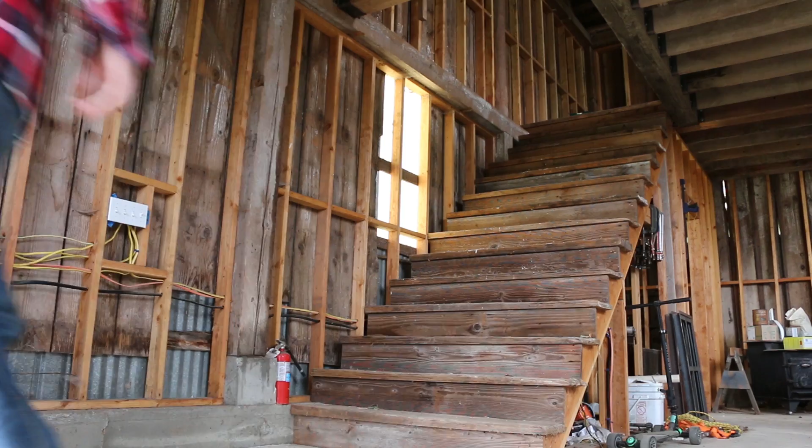Ready to start working on my deck. I'm really excited about it. I think it's going to be a fun place to hang out and drink a beer after work in the summer. So the plan is to plant hazelnuts in this whole field right here eventually, and my view will be blocked. So I think it'll be really nice to have a deck that's up high and you can look out over the field and enjoy the view we have here.

First, let's jump on the computer and I'll show you my design, and then I just got to get to work. I have some concrete being delivered in a couple days, and I got to build some forms for the footings down there. So let's go.

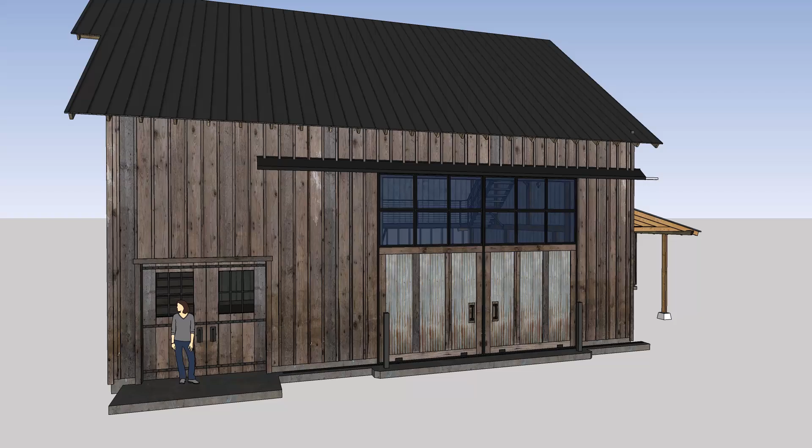My barn has an overhang on the north side of it, and I'm building the deck over the top of it. I thought about tearing the overhang down in order to build the deck, but it's actually a pretty convenient place to park a pickup or other farm equipment where it's out of the rain and elements. It might look a little weird having a deck above it, but you have to leave a little bit of room for practicality here and there.

Okay, so here's my rough game plan of how I'm going to build this deck. The first thing I need to do is to build a temporary wall to support the weight of the overhang, which will let me remove the wooden uprights supporting it. The 2x6s that are scabbed together across the underside of the overhang are rotten, and I really want to replace them with a bigger 6x6 pressure treated wooden beam.

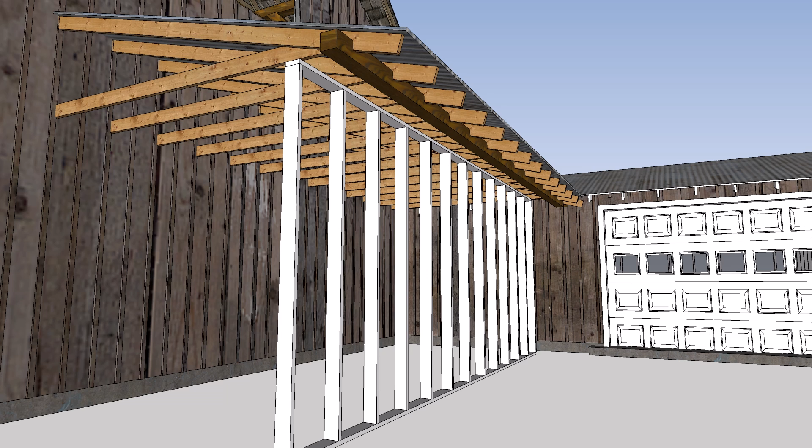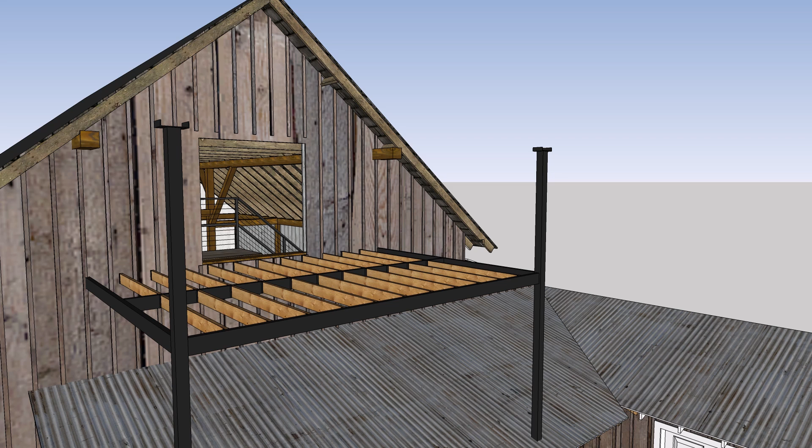Next, I'll pour some concrete footings that'll support the 4x4 square metal tubing that'll support the weight of the overhang, deck, and the roof above it. Once I get those in place, I'm going to attach some 2x6 metal tubing. That will be the frame for the deck, and I'll weld hangers onto these, which will hold the 2x6 pressure treated floor joists. On top of that goes the 2x6 cedar decking, and then I'll fabricate some railings.

I'm going to extend out these big wooden beams that run through the inside of the barn, and then somehow build some rafters on top of them. Haven't quite figured that part out yet. And cover it in roofing, which I also don't really know how I'm going to do. Lastly, I'll install a door to keep the owls out.

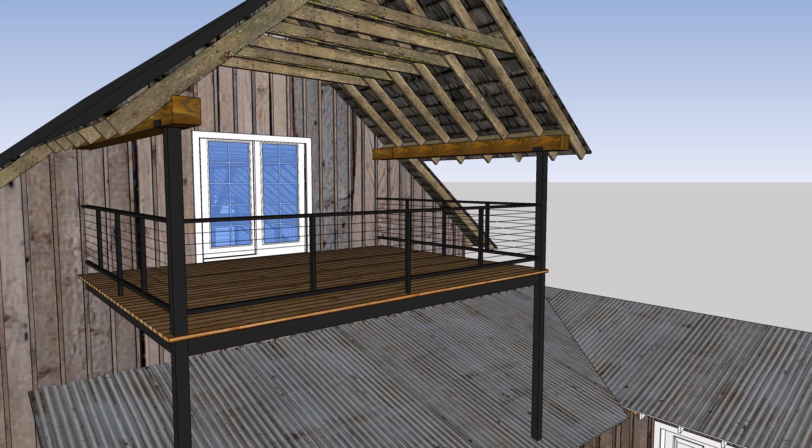That's the plan though. It's going to take a lot of problem solving along the way, but I think it's all pretty doable. It might need a little more bracing, some gussets on the corners, and maybe even some cross bracing across the front. But I'm gonna leave that for the end, after it's all built and I can see how it feels and determine if it needs more bracing at that point.

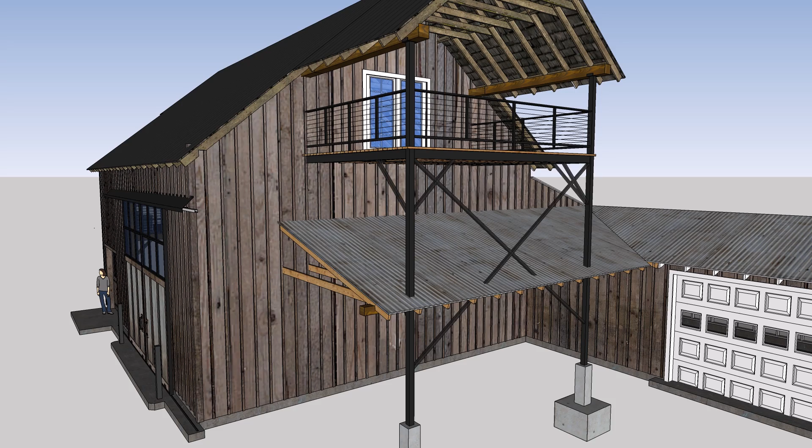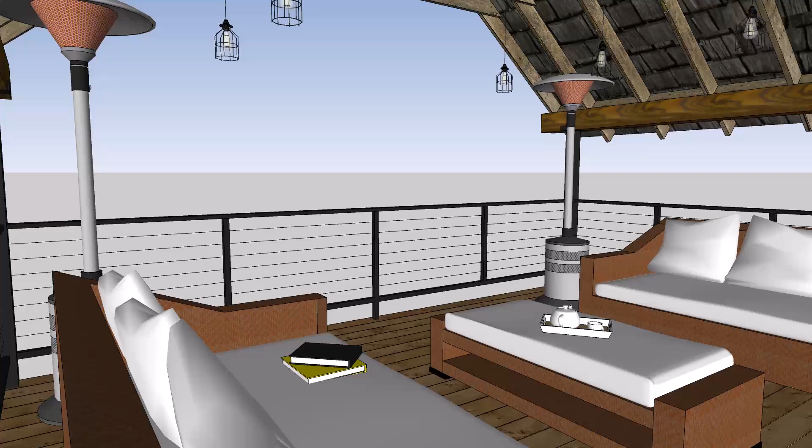Building a deck 20 feet in the air without a structural engineering degree and putting it out on the internet for everyone to see is a great way to create an unstoppable wave of scrutiny with regards to the deck's safety. With that being acknowledged, here we go.

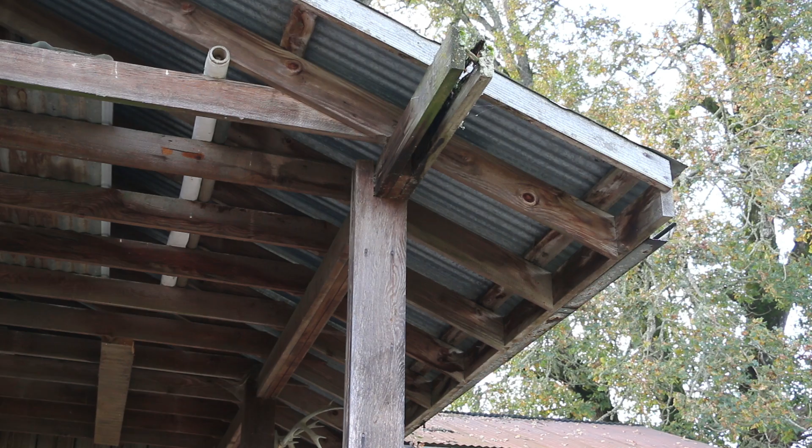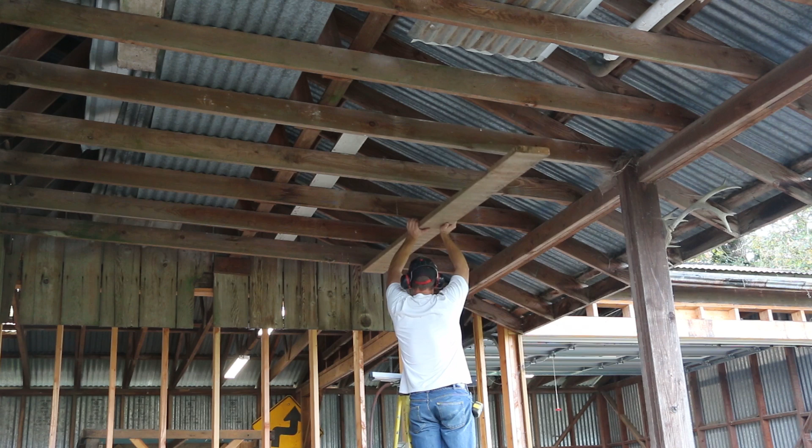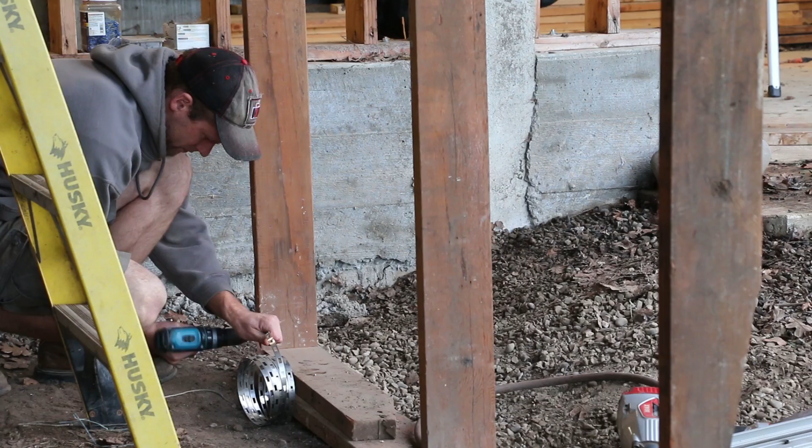The first thing I needed to do was to clean up the area underneath the overhang. I found out this area was my cat's litter box. It was a little gross. These are the 2x6s that I'm planning on replacing that support the weight of the overhang. I got to work building the temporary wall that'll support the overhang in the meantime. After I got all the uprights in place, I attached some metal strapping diagonally to give it some shear strength.

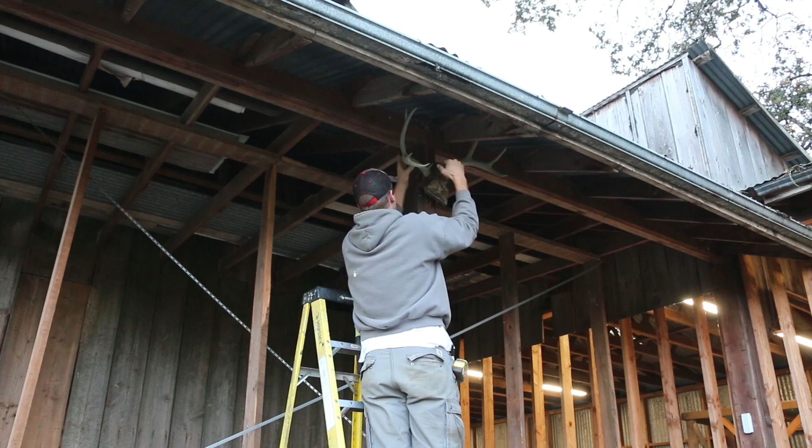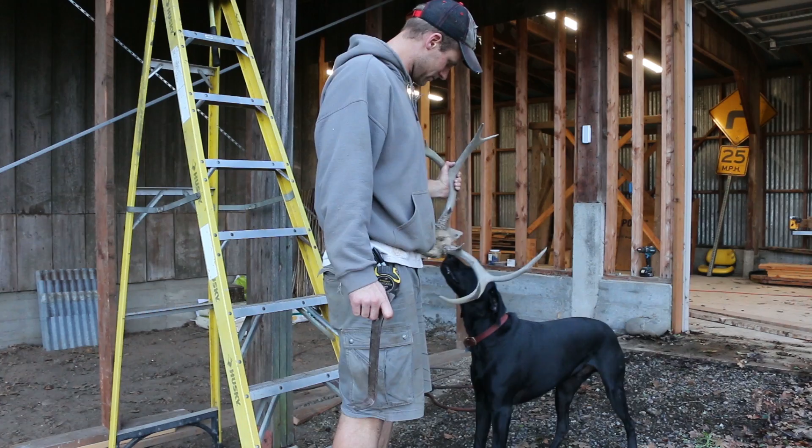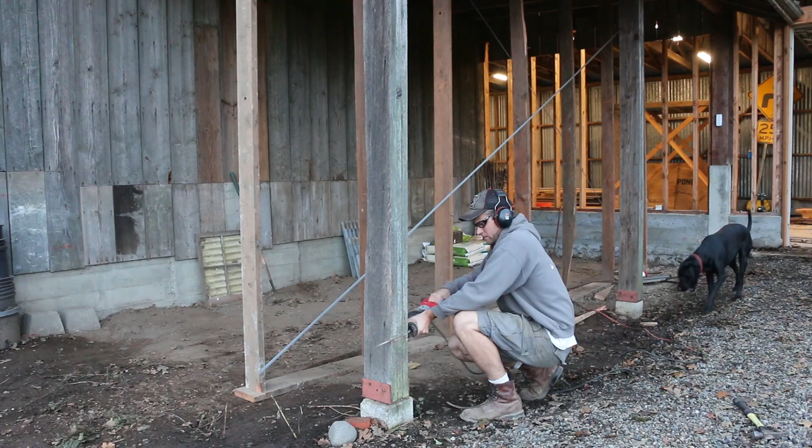It's now sadly time for the deer antlers to come down. Who knows how long they've been up there for. Drake definitely had some curiosity about them. Now that I was pretty sure the overhang was supported well, I could cut out the upright beams that used to hold it. I carried them to a scrap pile in the front of the barn, actually the back of the barn.

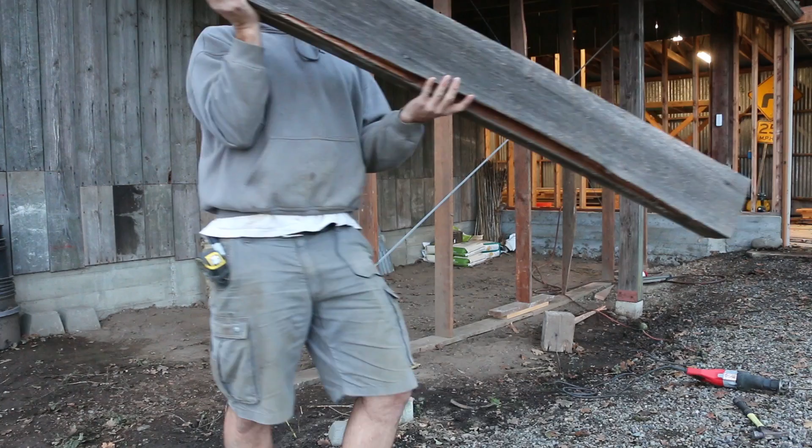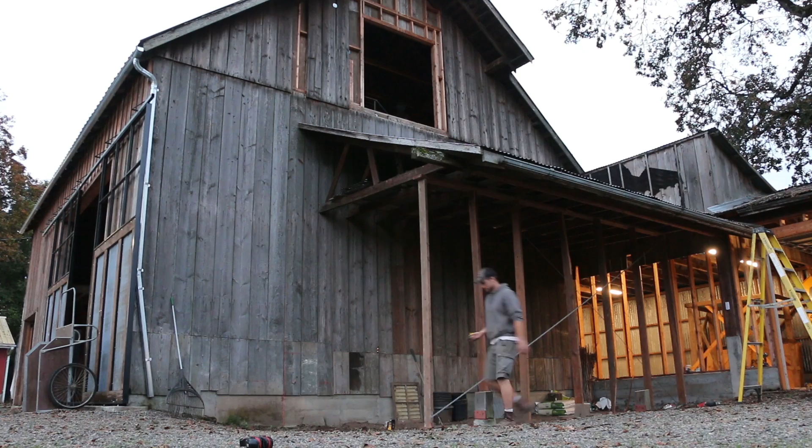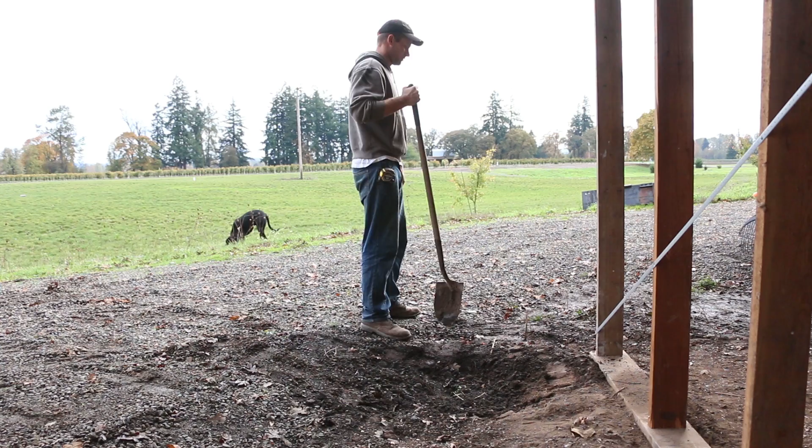I needed to find the approximate area the footings are going to go, and I used my laser level for this. It didn't need to be too exact for this part. I just needed to know roughly where the hole for the footing is going to go. After lining up on the two beams coming out the top of the barn, and also underneath the beam supporting the overhang, I was ready to start digging.

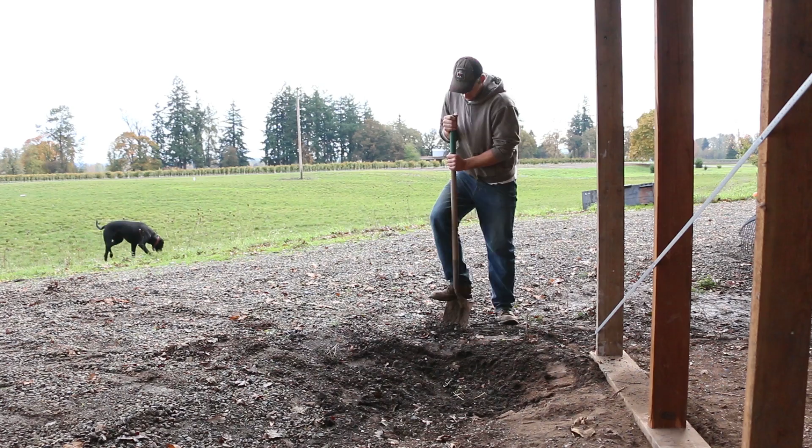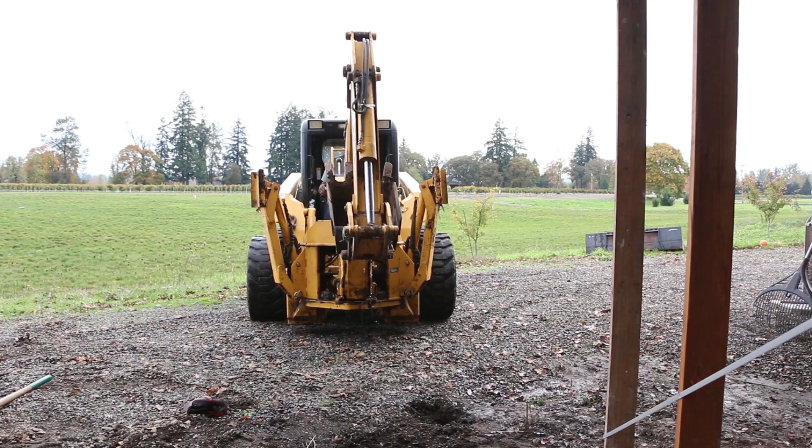I had a ton of energy, and I was really excited to jump in and work my butt off digging these big holes by hand. Some hard manual labor is always good for the spirit and soul. Okay, I might have grabbed the backhoe, but I definitely got most of the hole dug first by hand. Just thought I'd finish it off with the backhoe.

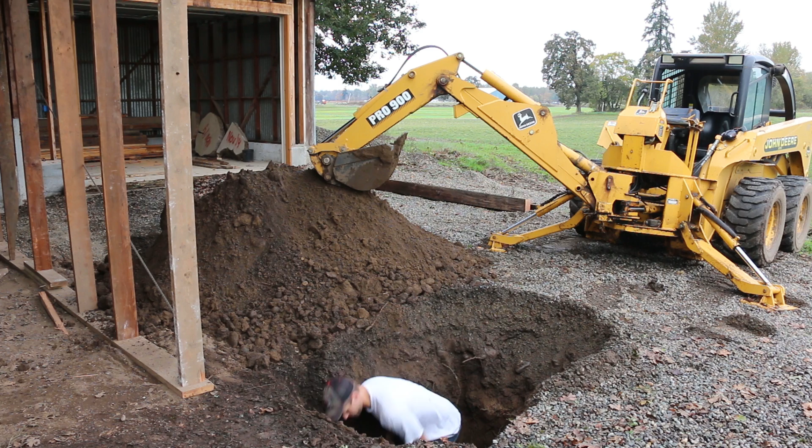I think Drake was really hoping we'd unearth a big dinosaur bone. He watched me dig intently the whole time. I wanted to put 2 feet of packed gravel at the bottom of the hole for the footing to sit on, which is why I was digging the hole so deep.

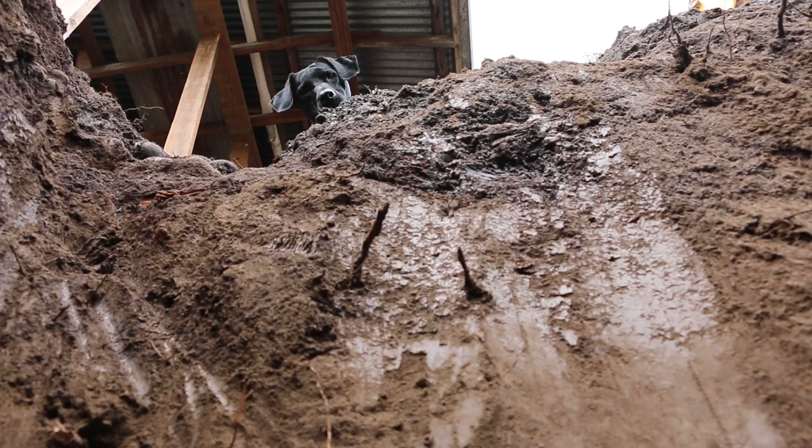Drake. And Drake's habit that I've grown to love of dropping the ball in the hole that I'm digging was a common occurrence here, of course, too. Once I had the holes dug out, I took some scoops off the gravel pile and dumped it in.

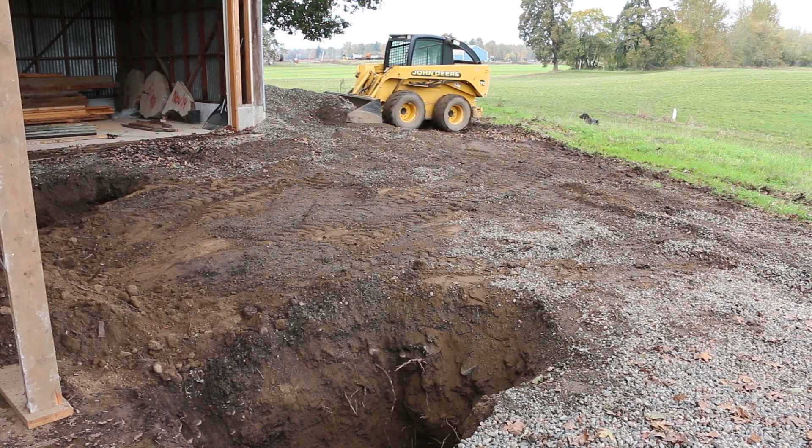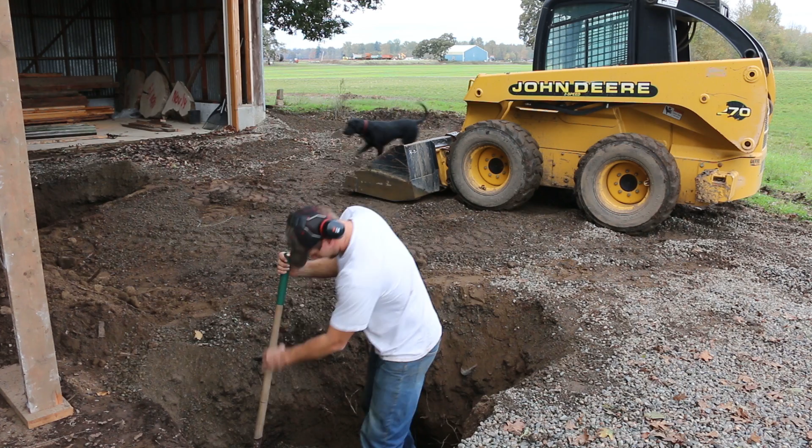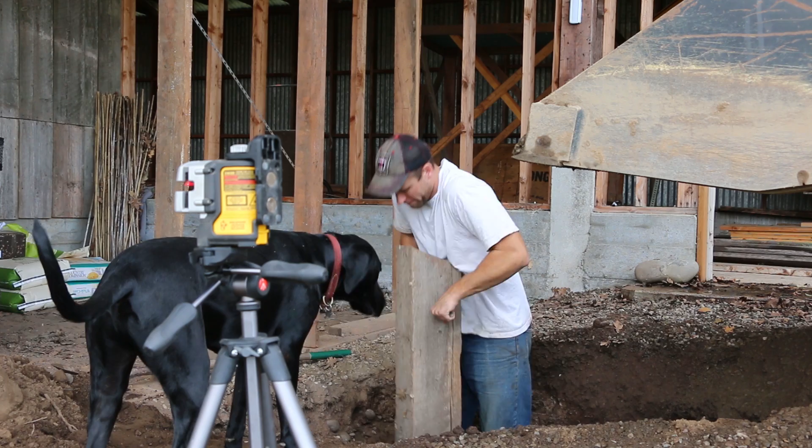Using my laser level set at any arbitrary height, I could measure down to the level of the gravel, filling the holes to the same height. And then my American-made Model 4000 gravel compactor reared its ugly head again. This thing's still not quite running right. Just can't seem to get that sorted out.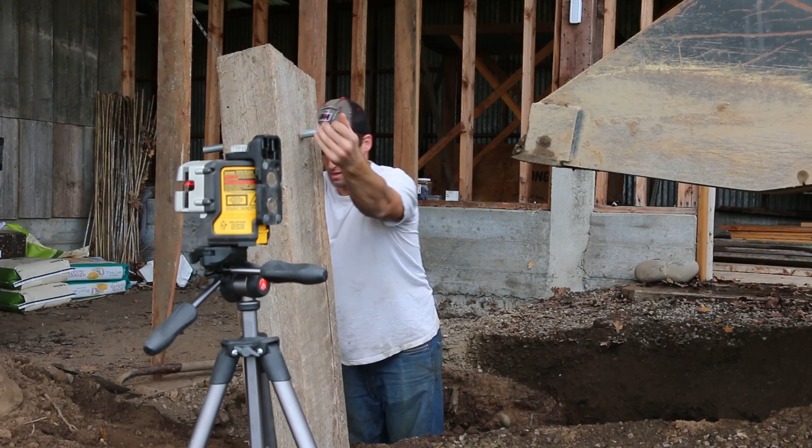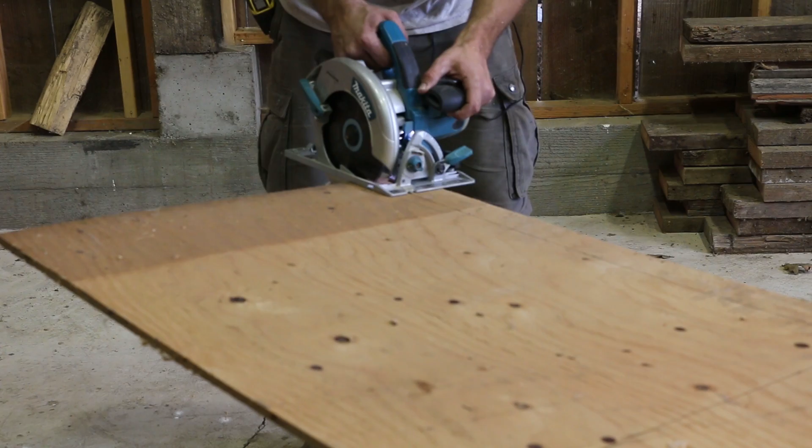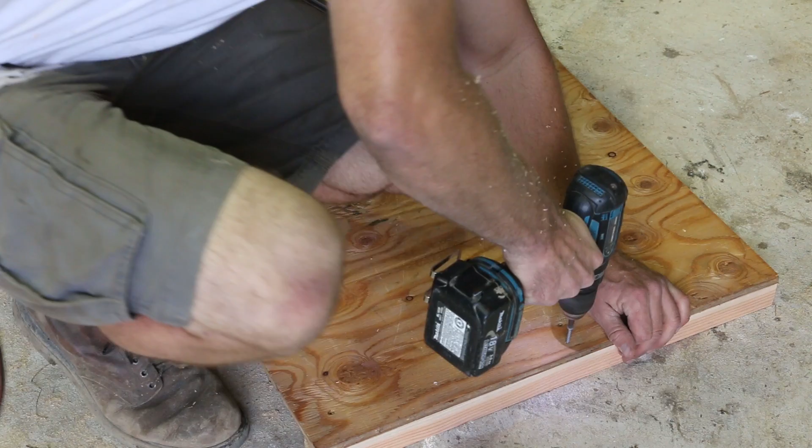I had some nice blisters after using that thing that I had to put up with for the next couple of weeks. Now that the holes were dug and my hands were jacked, I got to work building the concrete forms. I've made concrete forms a couple times now, and I've learned it's just about the worst feeling in the world when you start filling them up with concrete and they start bulging at their seams and deforming and leaking concrete everywhere. So I'd be sure to spend the time now building some forms that are good and strong.

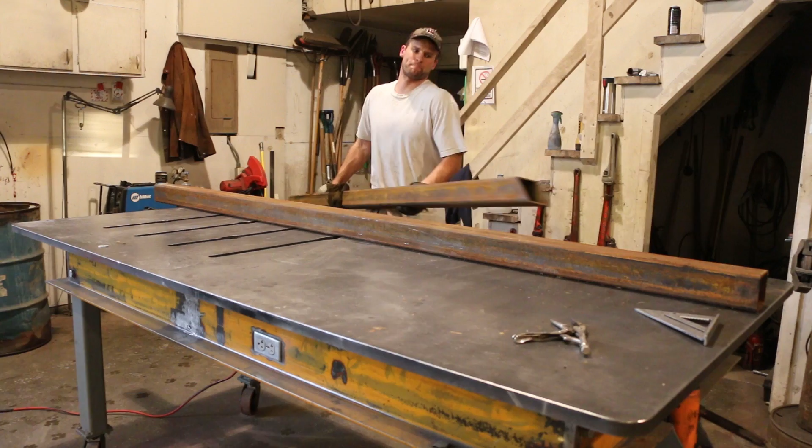I originally made these bottom boxes 3 feet in all directions, but they looked ridiculously huge. So I cut off the bottom foot. So now they're only 2 feet deep. Still huge, but looked reasonable to me.

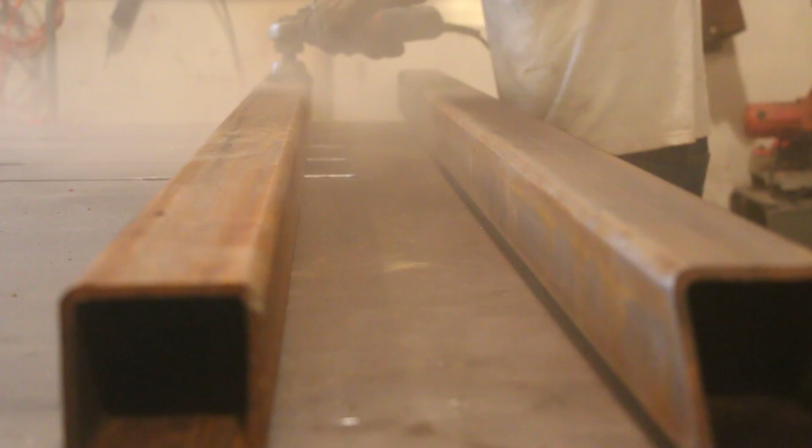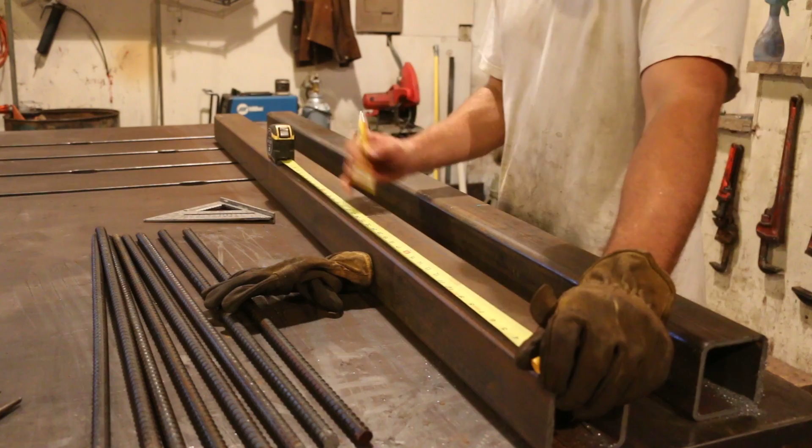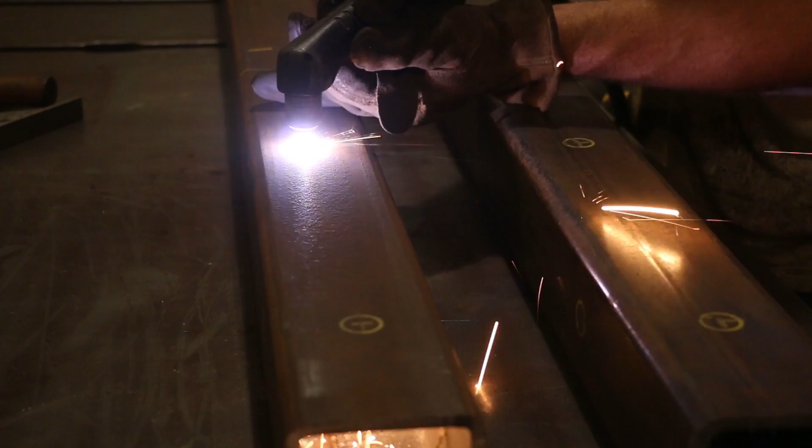I thought it would be good to have the metal deck supports welded to the footings and not just set on them. So I picked up a couple pieces of square tubing from the scrapyard that I planned to set in the concrete when it's poured. I wanted to cut some holes in it that I could stick rebar through, which will really give the concrete something to bite on. At least that's how I'm picturing it in my mind.

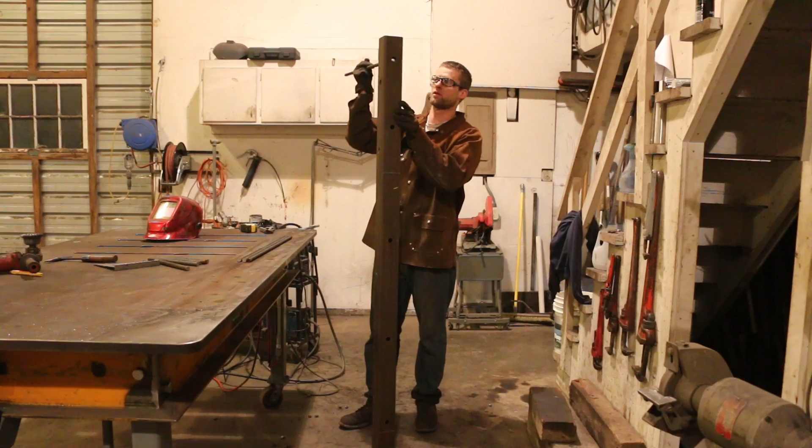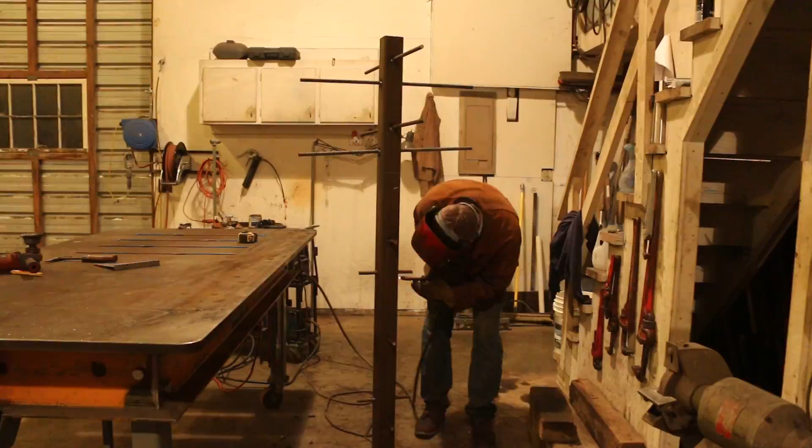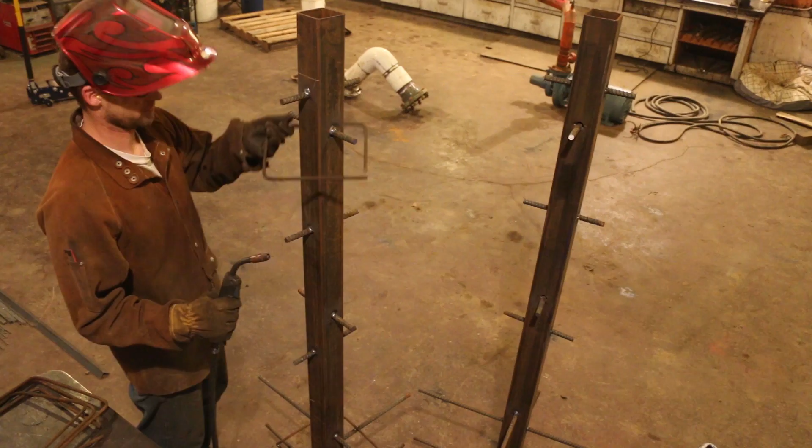It kind of started to look like the world's gnarliest coat hanger. Hey, feel free to hang your coat here. Just be sure you've had a tetanus shot recently. I welded some smaller rebar on around the outside of the frame.

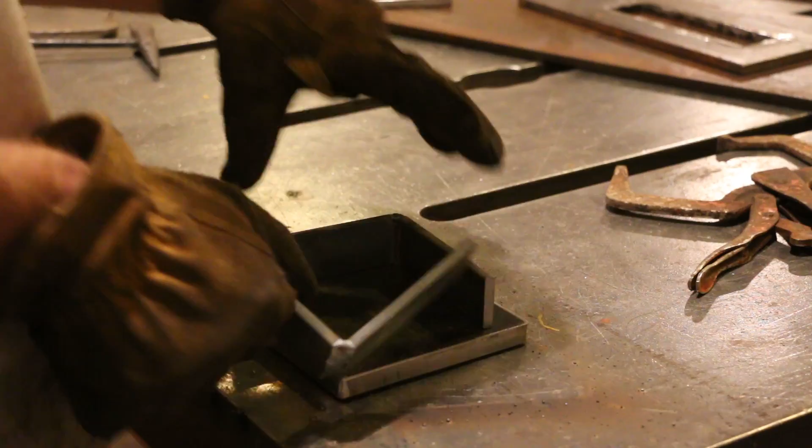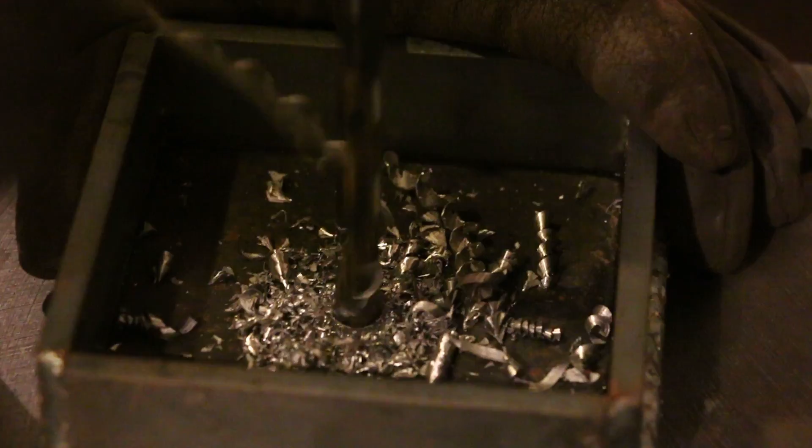Lastly, I wanted to make a cup for the upright deck post to sit into. I thought water could possibly get on the inside of the post, even though it's going to be welded shut, just from condensation, even possibly. And so I drilled a hole in the bottom of the cup so the water could just drain through into the ground.

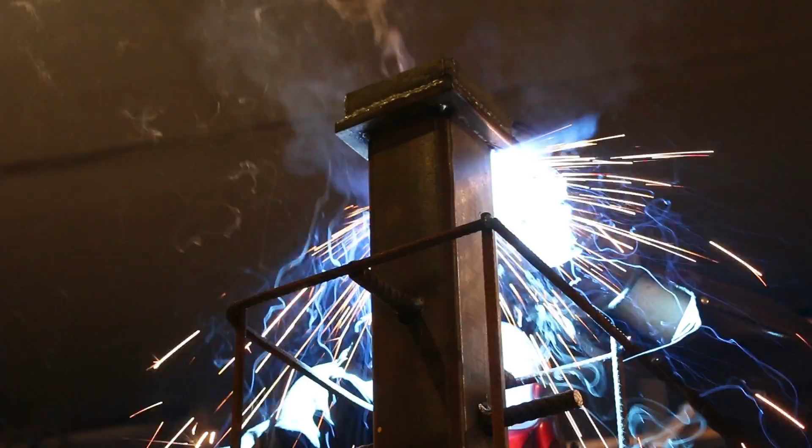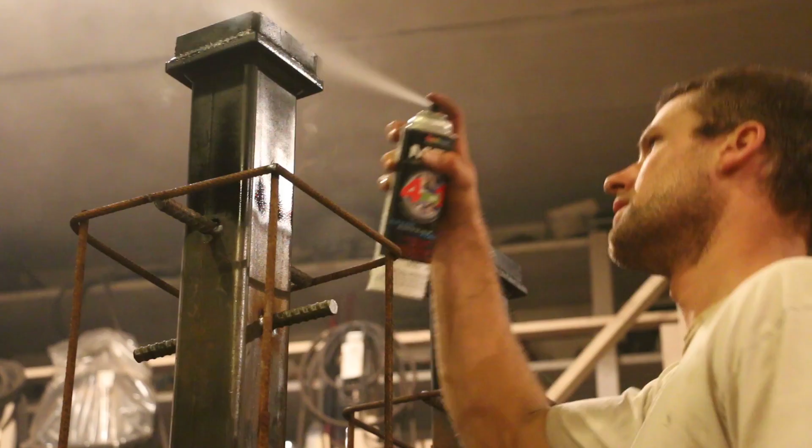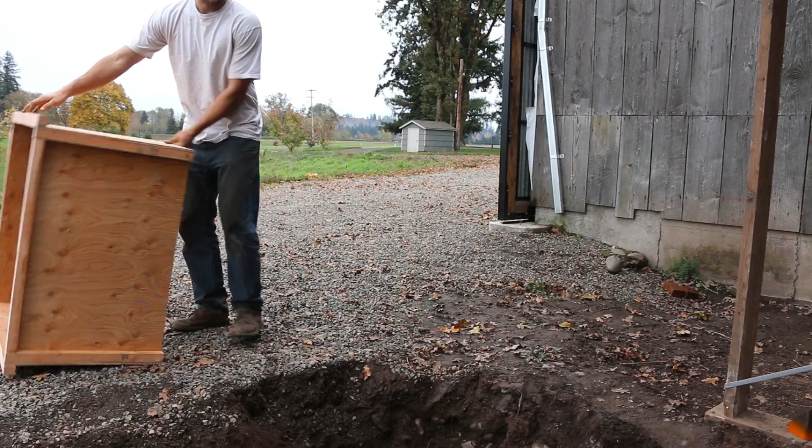Once I got the cup welded on, I gave it a little spray paint. This is the only part that'll be exposed out of the concrete, so I didn't worry about the rest of it. I hauled my new coat hangers down to my barn, along with my welder and the rest of the tools I needed. It was time for the laser level again, but this time I needed to be as exact as possible.

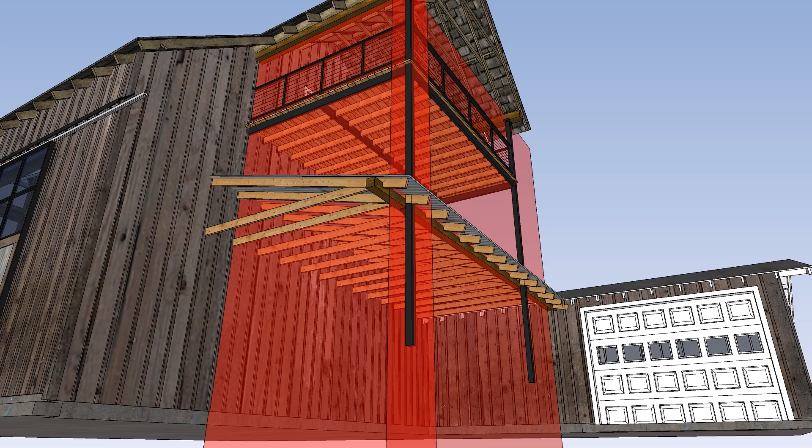I need to find the center of the beam up top, so the metal support post will be centered on it. And then I need to find the edge of the beam underneath the overhang, which is where the front side of the metal post will go. And then at this intersection, I move 2 inches away from the barn to mark the point that the posts and the footings will be centered on.

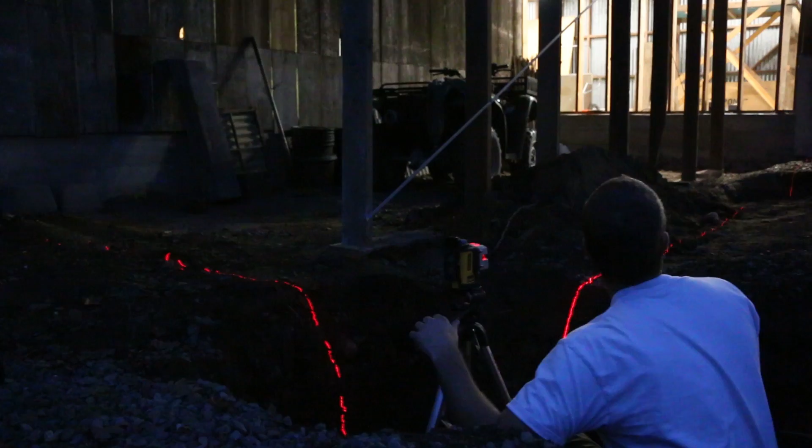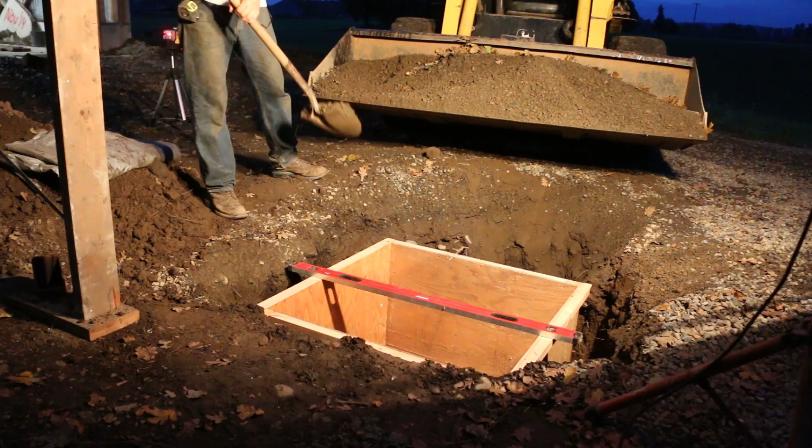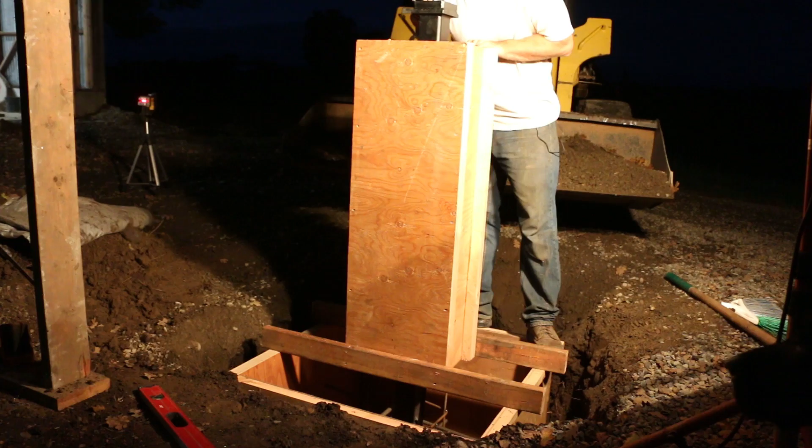I waited till the sun had gone down, which helped a lot with seeing the laser line. It took a lot of adjustment, but I finally got the laser to run parallel to the beam underneath the overhang and to match up with the mark on the barn. So I drove in a little spike to mark that point. I got the bottom form centered and level, and then held it in place with some gravel around the outside. I dropped in the coat hanger and then put the top form on over the top of it and screwed it down to the bottom form.

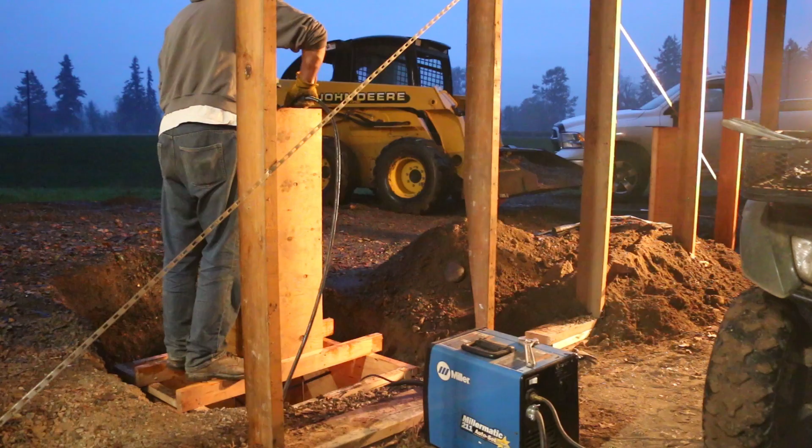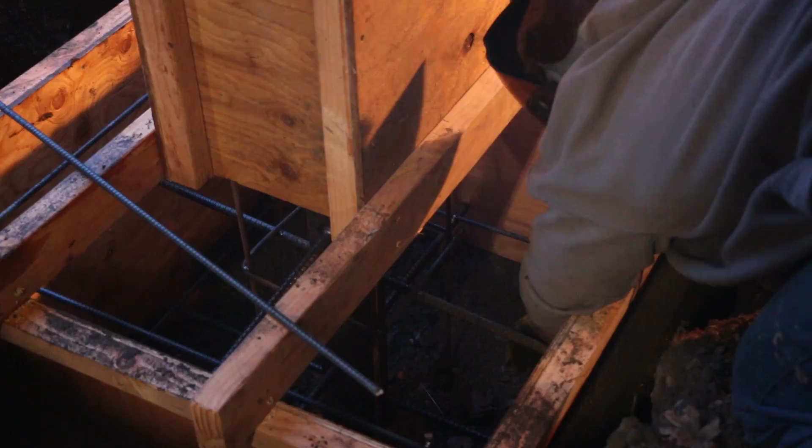The next morning I got up early to finish these up. The concrete truck was supposed to show up at 9 a.m. and I had a couple things to wrap up on them still. Bolted in a little more support, making sure they were centered, and then I was ready for the concrete. These mobile mixing concrete trucks are so cool to me. You can drive the whole truck and move it around from the hydraulic controls in the back.

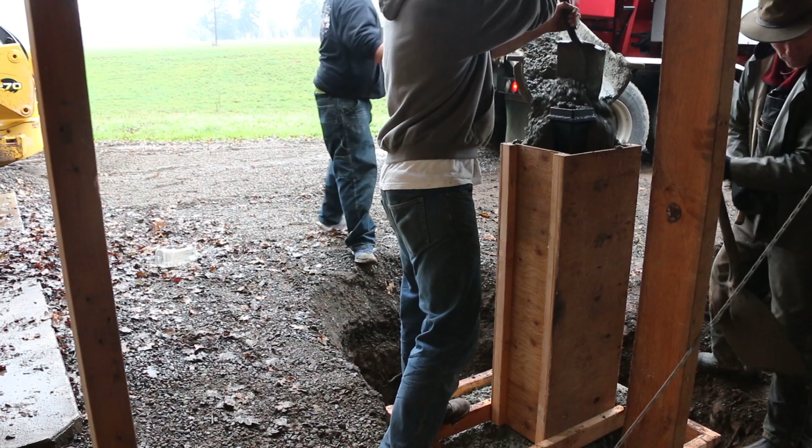He positioned the truck and the chute right over the form and started filling it in. My dad was nice enough to come give me a hand. It's kind of stressful when you have someone there waiting on you, and it's always nice having someone else to help settle the concrete and get the form filled in. So I should have rented a concrete vibrator. It would have really helped to fill in all the little pockets in the forms.

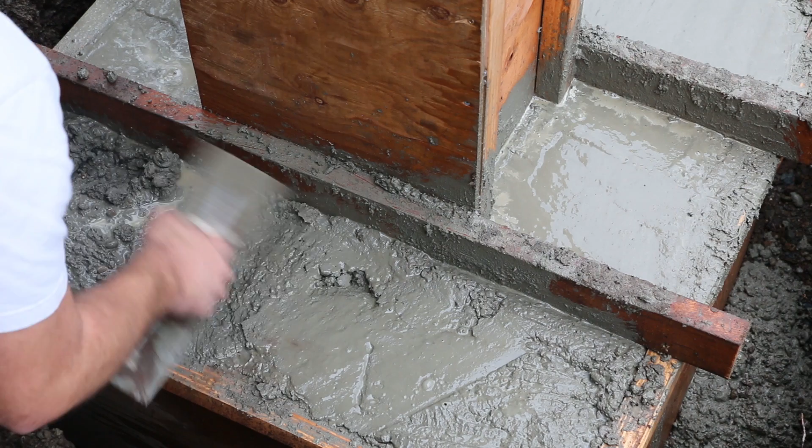Some of the rebar was a little too close to the wooden form, I think, and the aggregate would get caught. When I took the forms off later, I was pretty disappointed to see there were a couple cavities in the bottom of the top form. We started working on troweling the surface of the concrete. The bottom wider section will be buried in the gravel and it won't be visible, but we still worked it just for the heck of it.

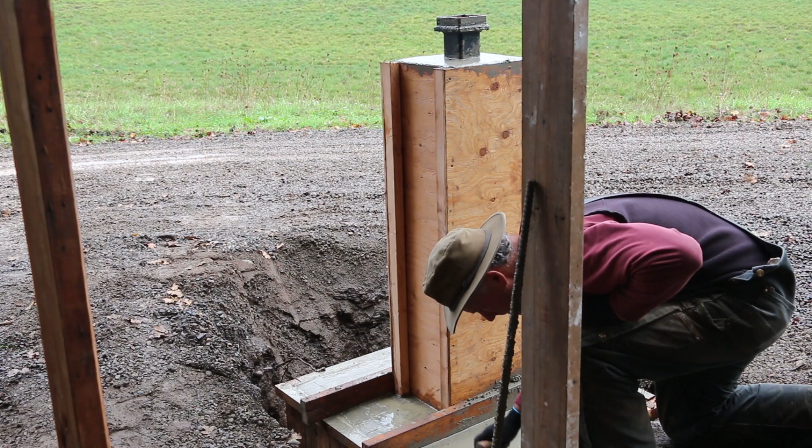My dad used an edging tool to round over the corners, which helps keep them from breaking off and makes them look a lot nicer. And my grandpa even stopped by to see how the concrete pouring went.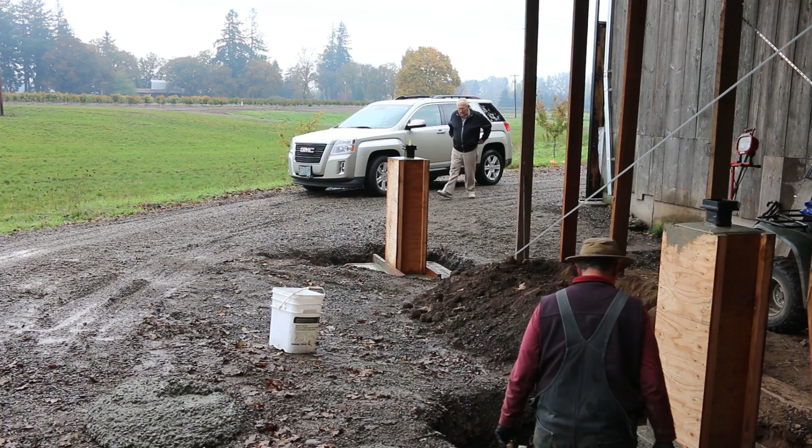Hey, too late? Yeah. Figured I was. Dad thinks you should have made them bigger. I was wondering that too, Jeff. I got a little bit of teasing for how big I made the footings, but I guess better too big than too small. I guess I'll go. Good. Thanks for the help.

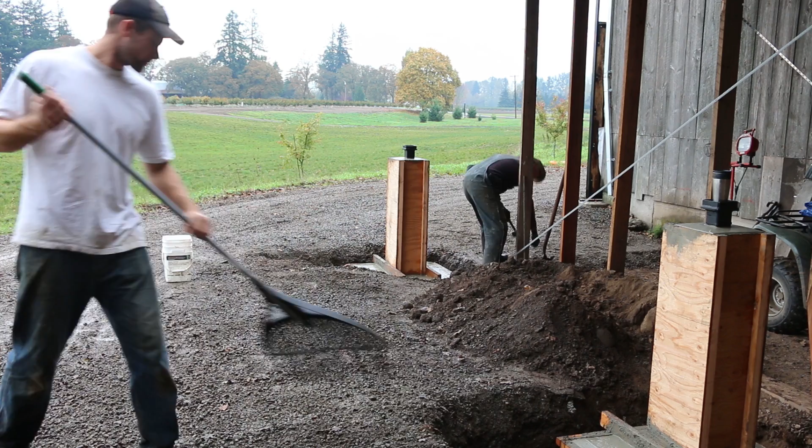And since I'm a human being just like everybody else, I couldn't resist the urge to write something in the wet concrete. Got pretty original with it too.